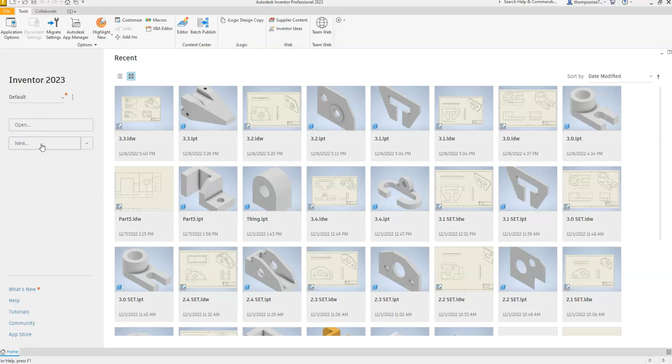All right, so we're going to do chapter 4, 4.0 in your textbook. This is the saddle bracket design. So we're going to choose new. And this one is in inches. So I'm going to go back to English, standard, inch, IPT, and create. All right, and it has us on page 4-7 creating this profile that is on step number 4.

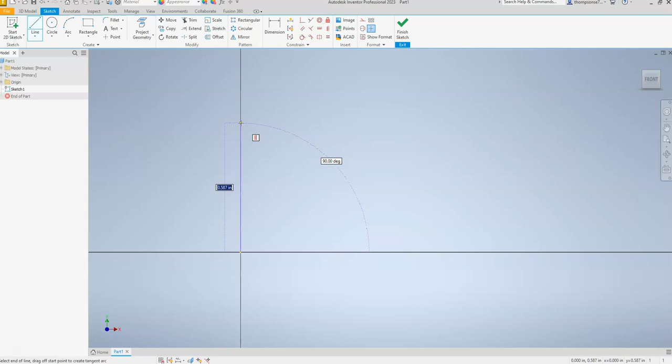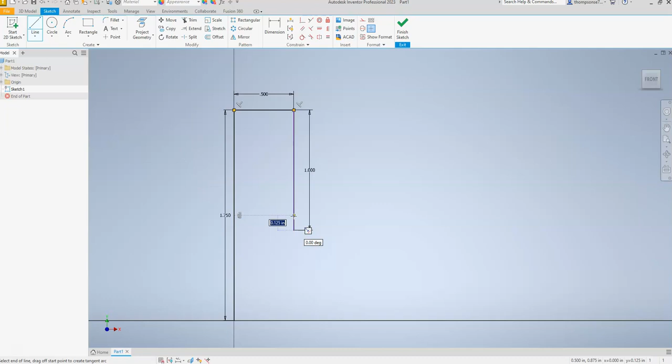So I'm going to start a new sketch, my XY plane like I usually do. I'm going to choose a line, and it looks like if I start by going directly up, that line is going to be 1.75. There we go. All right, so it looks like this one, 0.5. Doesn't tell me what this one is, but it does say that the bottom is 0.75, so I'm going to assume that this is going to be 1. Across here, it does not tell me, but if I do my math, it looks like it's going to be 1 as well.

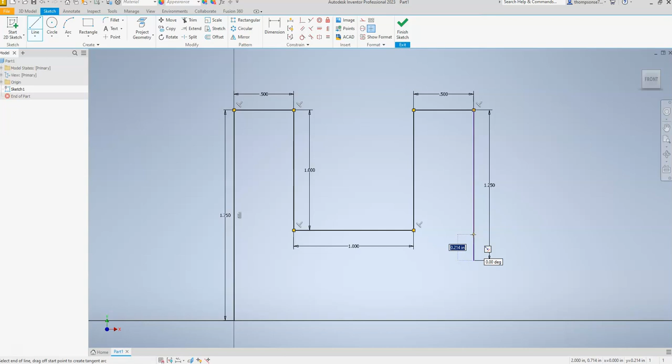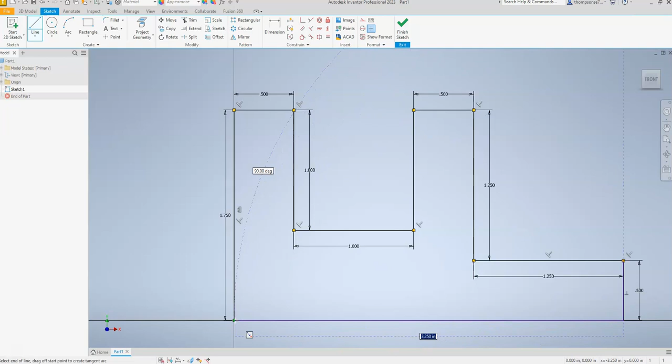Back up to where we started. This is going to be 0.5. And if this whole thing is 1.75, the bottom is 0.5, this line going straight down will be 1.25. So if that's 2 from here to here, and the whole thing is 3.25 wide, that means this is going to be 1.25. And this should be 0.5. And then this should be 3.25, perfect. Everything is black, so we are fully constrained, it looks like, so we can finish our sketch.

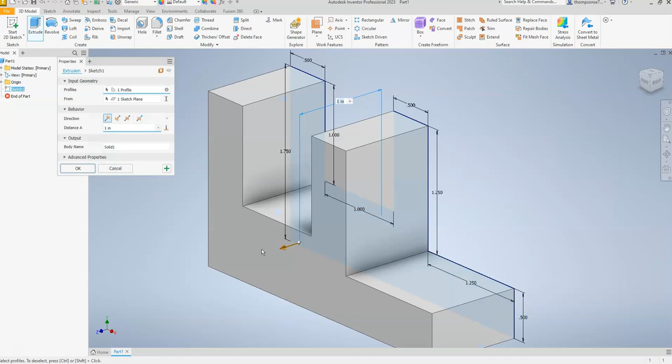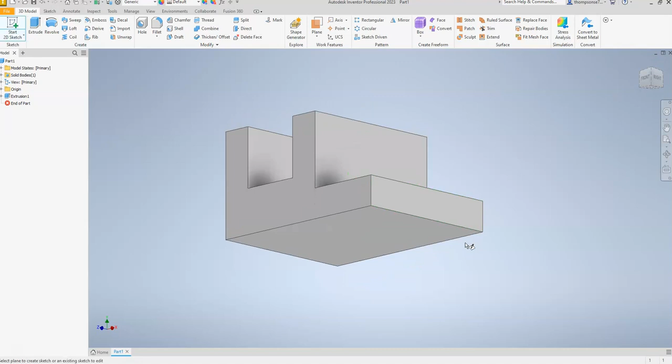Right, so we're going to extrude this by, it looks like, 2.5. So extrude, that's my only profile, so it's going to automatically choose that, 2.5, say okay. Right, so now we have this. Now we are going to start a new sketch, and now we're going to put the rounded feature on the front. So I'm going to rotate around so that I can choose the bottom. There we go.

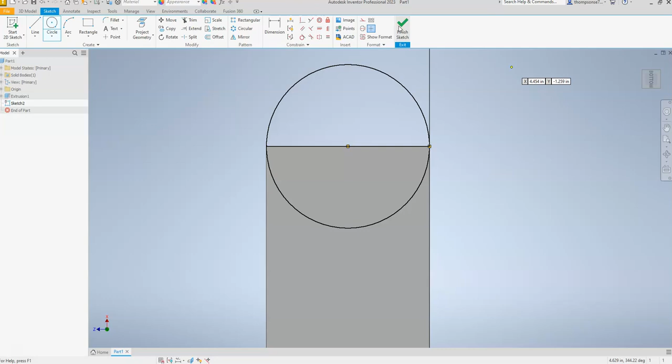We want a center point circle. So I'm going to hover around until I get that center point right there where it turns green. And I'm going to come out and it should be a 2.5 diameter circle. All right, so now we are going to finish sketch. Extrude, I'm only going to choose this part of the semicircle. And then I'm going to make sure it's a join. And I'm going to do To.

I'm going to choose To right here. What does that mean? That's going to go to whatever I choose. So once I click To, it wants me to select a face. So I'm going to select this face here, and that's where that extrusion will meet. And click OK.

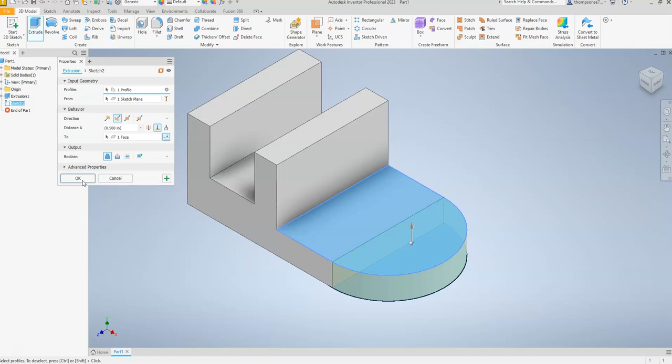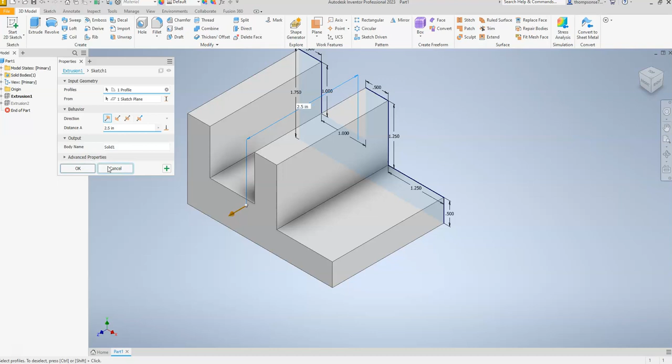It does want to point out that we can change the names of our extrusions. So this one, it wants us to name that the base. So if we hover over this and right click and come down, where's that? There should be a rename here. The feature. Oh, no. Oh, there we go. All you have to do is left click it. And this is going to be called base.

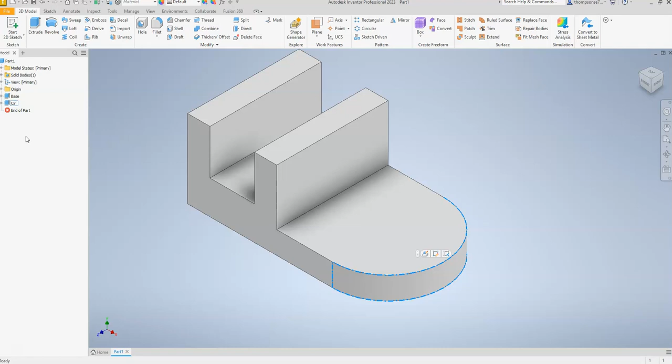Okay, and then this one, same thing, extrude. It opened it, I didn't want that. There we go. If you click it and then click it again slowly, not like a double click. This is going to be circular end. All right, there we go. So we want to select the base and right click, and we want to show dimensions, and it wants us to change this.

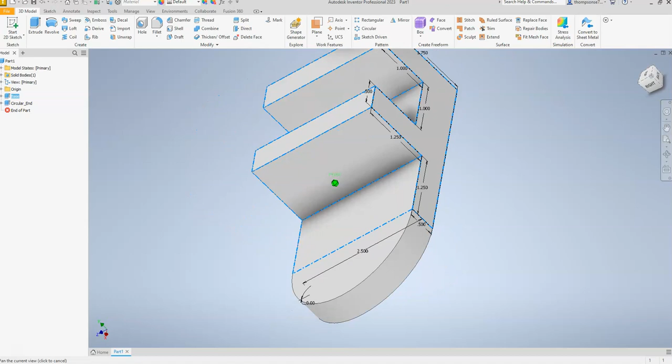Where is my dimension? It's got to be down here somewhere. Oh, I didn't make that dimension. All right, so if you did what I did and did not make that dimension, you're going to have to go back in here and make it. So from end to end is the 3.25. That's the dimension it wants. And that's going to be a driven dimension. That's okay. So finish sketch. All right.

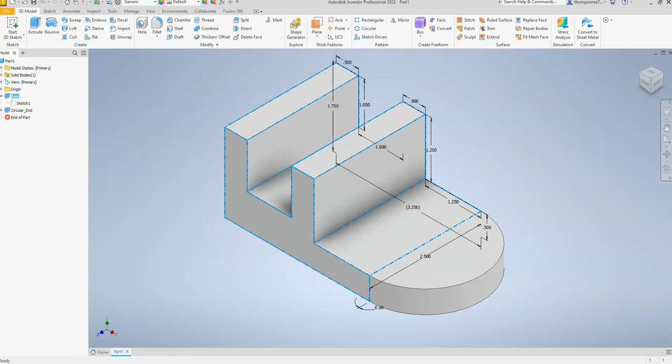And now we want to show those dimensions again. Now it wants me to double click on that one, and it's not going to let me change it because I had these other dimensions. Actually, it wants me to delete that one. So since it is a driven dimension, I'm going to go back, I'm going to delete this guy and this guy. I'm going to redraw this one.

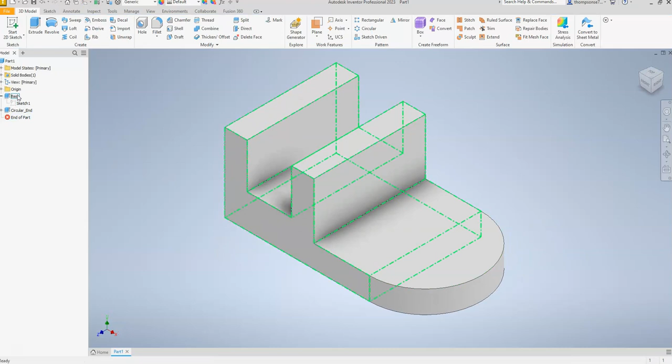There we go. All right, I messed up by putting too many dimensions there. So we're going to go back and show dimensions. It wants us to click on this one and change that to 3. Shorten that right up. And then I'm going to click this up here and that'll update your model. Come back in again, show dimensions. And now it wants us to change this 2.5 to 2.

And update. There we go. So it's a little bit skinnier, a little bit shorter. And that is called the local update. So whenever you make a change and it doesn't necessarily update here, click that and that will update that for you. All right, so now we are going to put the hole right in the middle here.

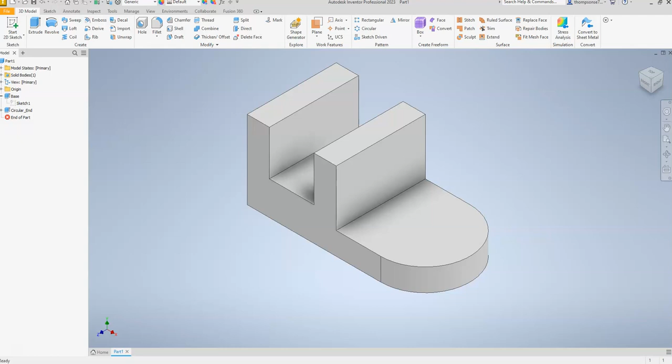So I'm going to choose the hole command, and it wants me to pick the bottom plane again. So I'm going to come down here, and there's my hole. But I want to make sure that it is concentric to this arc, so I'm going to choose the bottom arc here, and that makes them share a center point. All right, so the hole diameter is going to be,

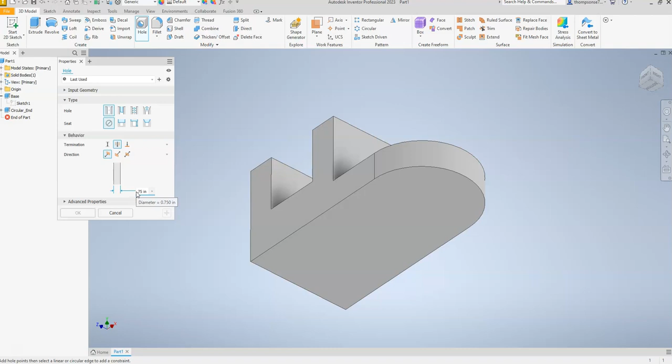oh, why is this in millimeters? Well, that is different, considering everything else is in inches. I want this to be 0.75 inches. Oh, it took it away. Where'd it go? There we go. That was weird. I've never seen that happen.

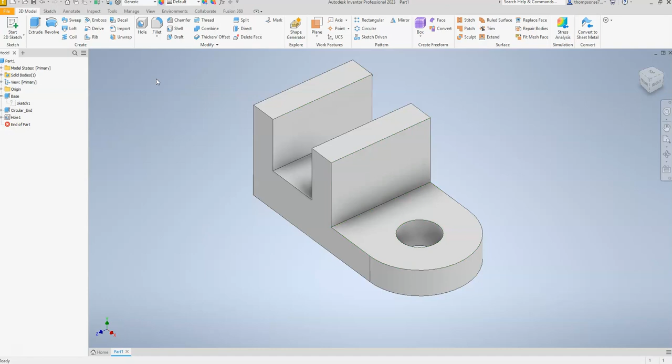All right, and we want to make sure that this is through all, and we can say OK. All right, so now we have our hole there. So remember, if yours does pop up on millimeters like mine did, just type in inches. All right, so now we are going to cut the rectangle through this part. So I'm going to start a new sketch. I'm going to choose that plane there. And let's see.

It wants us to put a rectangular cut of 1 by 0.75. So I'm going to use a rectangle. Put that in there. Dimension, it's going to be 0.75 from the top. It's going to be 1 from side to side, and it's going to be 0.5 from one edge. There we go.

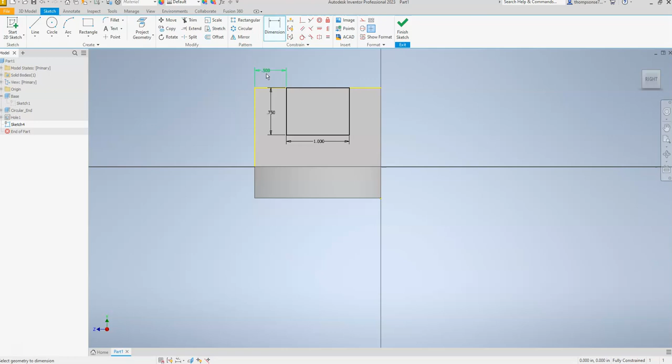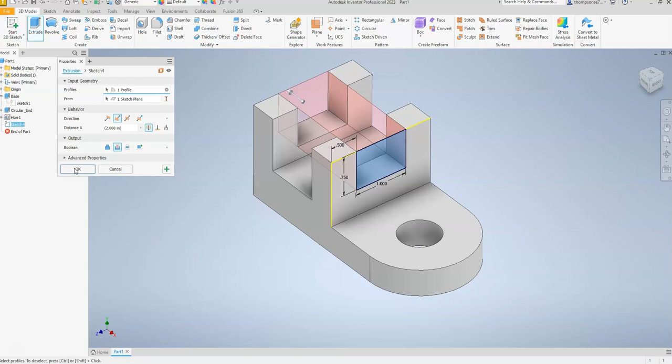All right, so it wants us to extrude this, and it wants to do a to next, just to kind of show you what happens there. So to next, it'll go until it hits the next object and it'll stop. However, we're actually going to want this to go through all. Just like so. And say OK. All right, so that's everything.

We only have one thing. We have to add a fillet here. You could simply just add a fillet like so. This is going to be 0.25, 0.25, and you would just select that edge. But I am going to show you another way to do it. I'm going to go back into Sketch 1, and I'm going to do it from here.

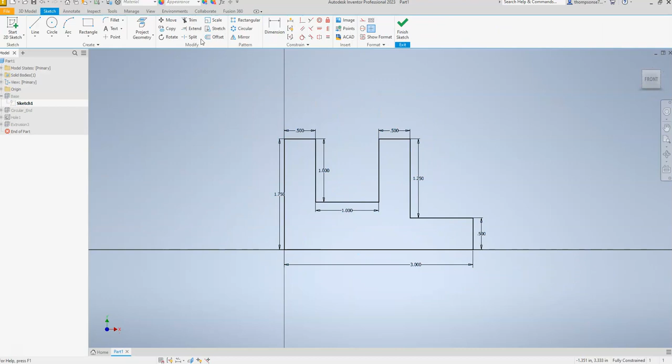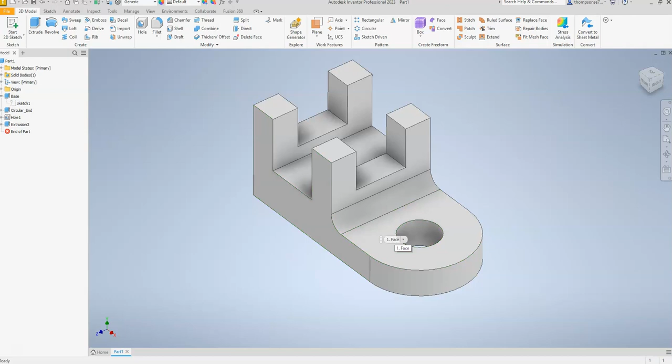I'm going to choose fillet. This is going to be 0.25, and I'm going to come and click there. Finish sketch. And it updated itself. That's all for the part. So now we have to make our drawing. So file, new. Actually, it's going to make me save this first. And this is going to be 4.0.

Now I'm going to do my drawing. We can definitely make that a little bit bigger, maybe even 3. Let's see. Yeah, I think that'll work, and I can actually bring this down just a wee bit. Okay, so the first thing I'm going to do is add my center marks and bisectors. So one center mark there, and a bisector there, since that's the middle of my hole, and same thing on the side view.

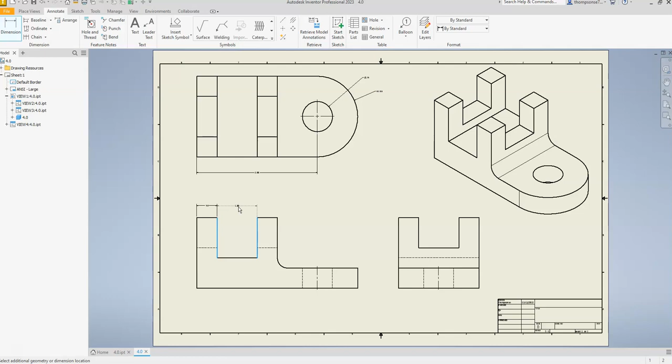All right, so now we can start placing dimensions. All right, so I'm going to do my total length here. There are my diameters. All right, that looks good. So now I'm going to go from here to here. Lined up. There we go.

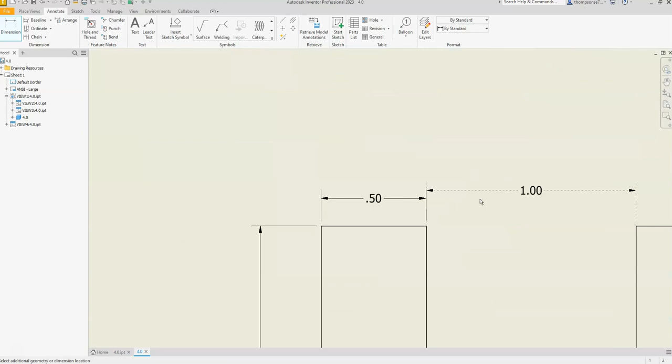Right, now I'm not going to do all 3 dimensions here because we already know the total width. The total width is the same as the radius here. So your total width is going to be 2. So I don't need to place that there. I do need that because it is different from the other side.